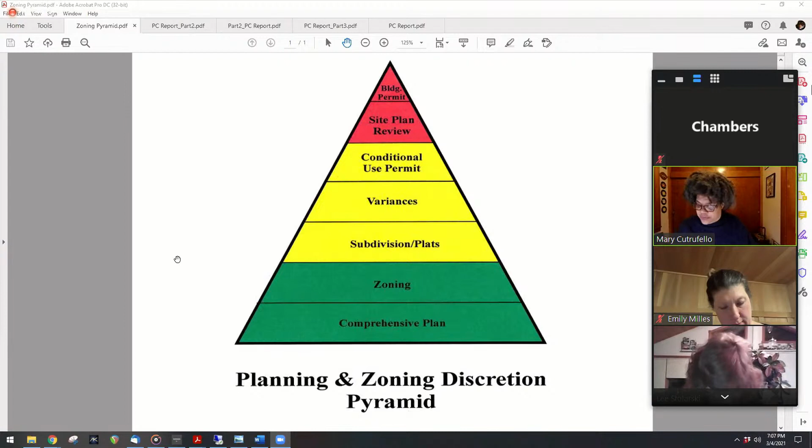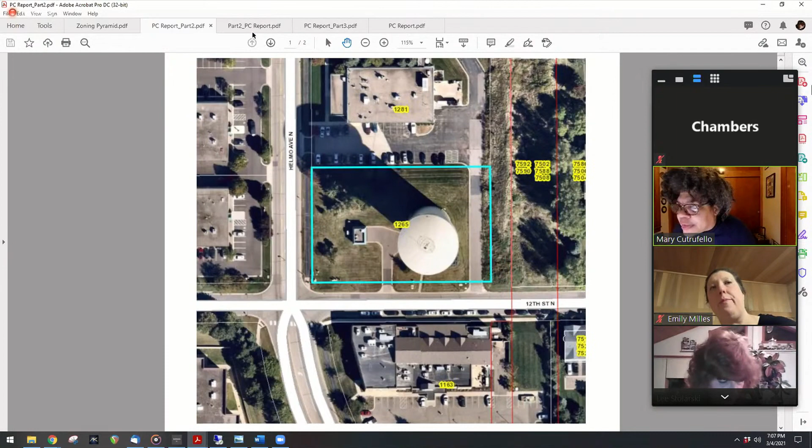So the idea is to build a temporary facility right here, on the same site as the existing water tower.

It'll be used to increase capacity, partly because of the new population expected to move into Willowbrook at Helmo Station, and also because there are some issues with four of our wells with PFAS in the drinking water. Brian Bachmeyer is here and can explain that a little bit if you have questions.

That's not really my area of expertise, but this is the plan for the site. This is the building. There's not any striped parking because it's not going to be manned on a regular basis.

The city comes by and inspects the well and the water tower every day, and they would just make this part of their daily inspection routine.

So other than that, it meets the requirements in the zoning code for lot coverage, setbacks, exterior design, and so on.

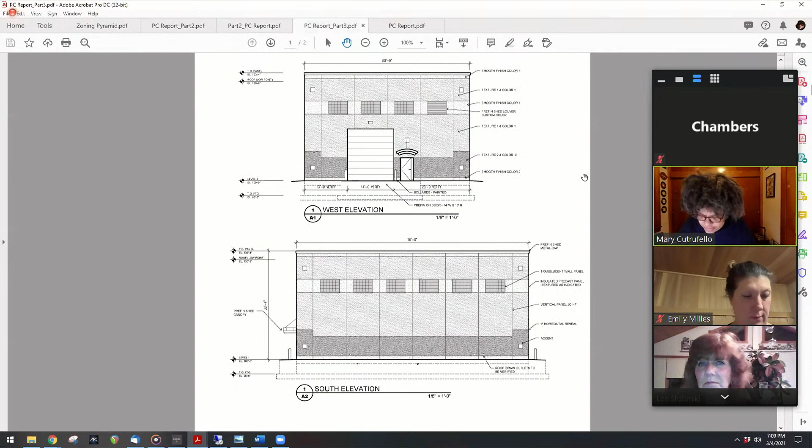They're going to add a bunch of new trees, and this is what it looks like. It's just a very nondescript building. It does meet our exterior design standards for class 1 and class 2 materials.

It's the back of it, looks a whole lot like the front. And other than that, there's...

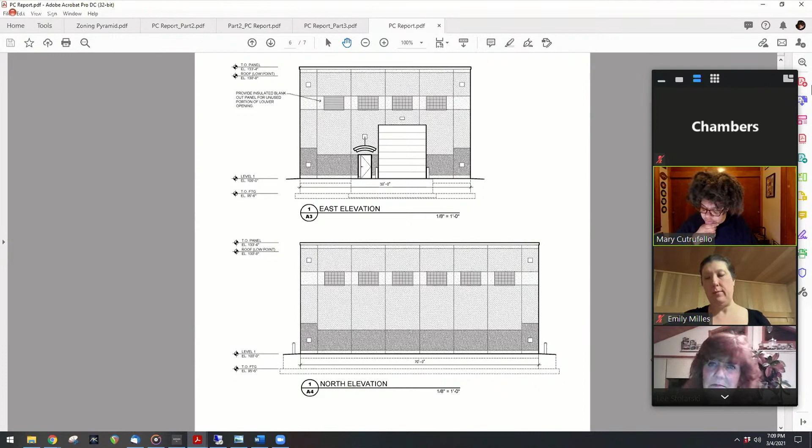Brian is cool with it. Cheryl Milgren has done her review, is fine with it. The fire chief, Kevin Wold, is fine with it.

And since it's in line with the comp plan and it follows all of the zoning code, staff recommends approval of the site plan, especially given the fact that the water situation is starting to come to a head, as it were. That's staff's recommendation.

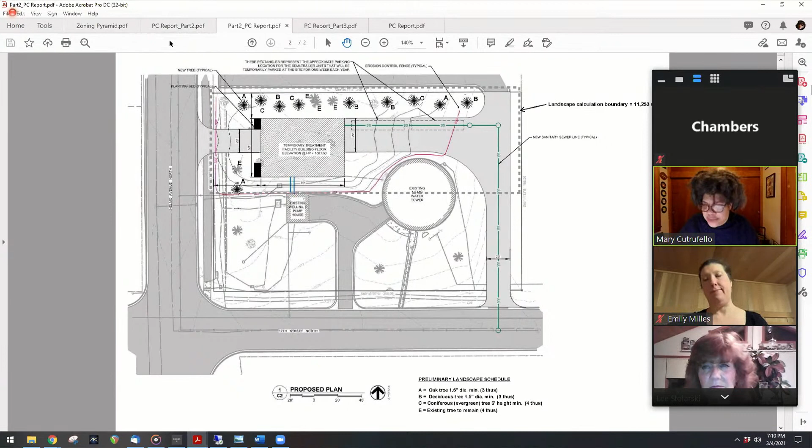As I said, Brian Bachmeyer is here, and if you have more technical questions, please direct them to him. Otherwise, I will answer any zoning related questions that you may have.

Do any of the commissioners have any questions? I have a couple of questions. Okay, Dallas, go ahead.

Mary, probably you'll pass this to Brian, but the first question that comes to mind is in the report, you mentioned that it's a temporary building. There's no mention of any duration or why it's temporary versus permanent, given the cost that would be involved.

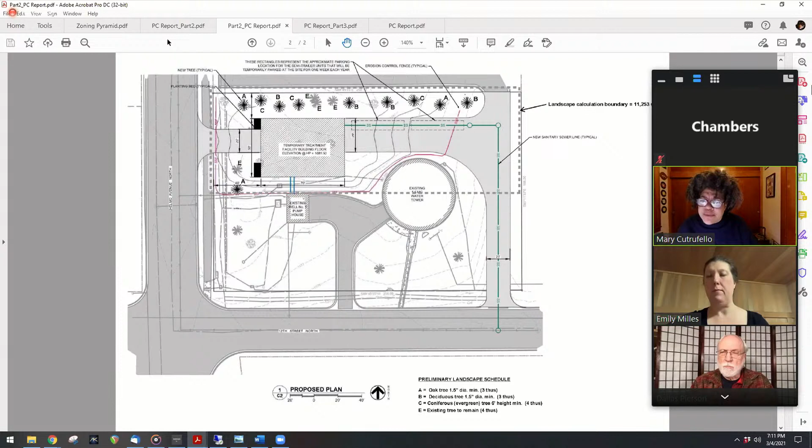It's temporary because when the new comprehensive facility comes online in 2025, all of the water treatment will be moved to that facility, and then this will be used for storage of off-season equipment. I'm thinking plows in the summer and things like that.

Okay, and I guess I've got a couple more questions that I had discussed with you and Brian. Perhaps you'll want to have Brian answer. The description of the treatment facility and what kind of treatment, carbon filter. And then questions on the well status, what the PFAS is at this location versus the ones we're currently using.

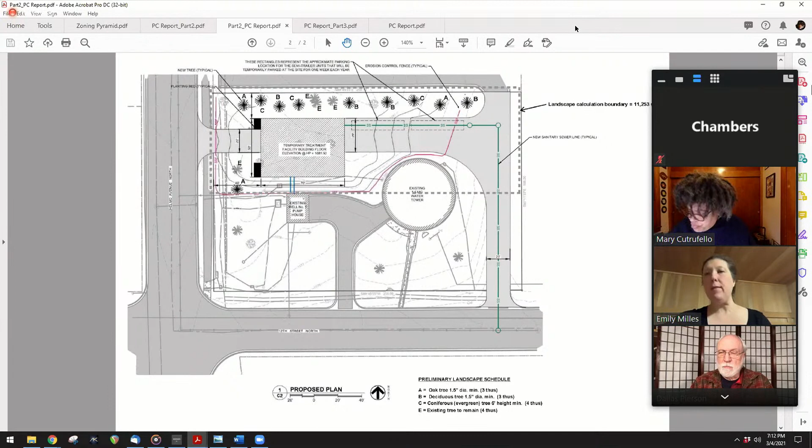Good evening, commissioners and council member Olson and city staff. This is Brian Bachmeyer, city engineer with Oakdale. Pleased to be here this evening to talk about our temporary treatment facility at the Well 7 site.

And I did prepare just a quick presentation. If I may go through it, I'll share it on my computer screen. It's pretty much based on a conversation that Commissioner Pearson and I had earlier this week. I think he had some good questions, so I thought I'd prepare a presentation to share with you that goes over the justification of why we're going to be doing this.

And probably kind of explain and try to answer some of the questions Commissioner Pearson may have. So if I may, I'm going to just share my screen here quick for a PowerPoint presentation.

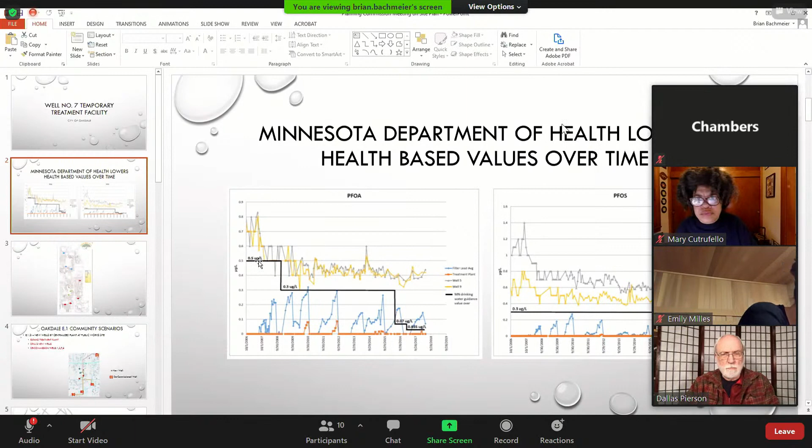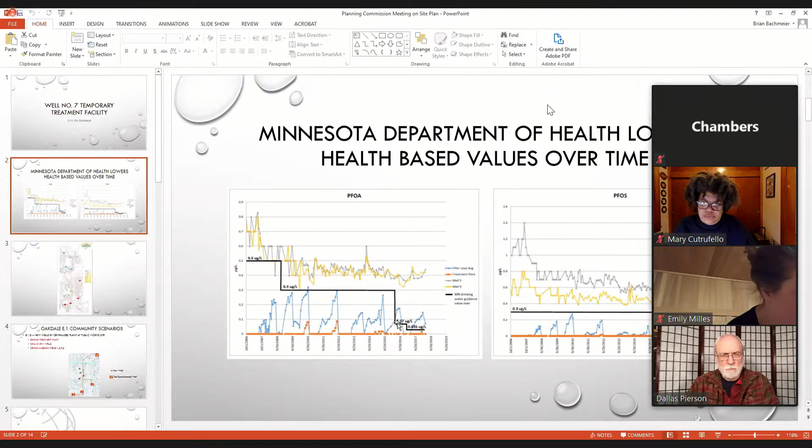The Minnesota Department of Health has, over the last 15 years, lowered the thresholds for what requires a well to be treated. Starting in 2006, PFOA and PFOS, those are the two PFAS materials that are heavily regulated. Back in 2006, they allowed 0.5 parts per billion in the raw water, then it dropped down in 2008 to 0.3 parts per billion, and in 2014 it dropped to 70 parts per trillion, which is 0.07 parts per billion. Then later in 2017 they dropped it down to 35 parts per trillion. So you can see how the regulations have become more and more restrictive over time.

What's on top here are the raw water levels of well 9 and well 5. Those are the two wells currently treated through our existing treatment facility. You can see the raw water exceeded those allowable standards.

Down here is the water as we're treating it. After the first vessel, it goes through two vessels, a lead and a lag. After the first, you can see it reduces the contaminant level from here down to these thresholds. And after we polish it through the second filter, it drops down to virtually non-detect. So those are the red numbers through here.

So you can see over time, we were meeting the regulations, and now the water coming out of the treatment plant is still below these very restrictive thresholds of 35 parts per trillion. Same for PFOS.

You can see we schedule the change outs as the lead filters start getting close to the thresholds before they go through the polish or lag filters. The resulting discharge out of the treatment plant is the red, consistently less. So those are the two wells, and that's how effective the treatment plant is that we currently have on the Public Works campus at 1900.

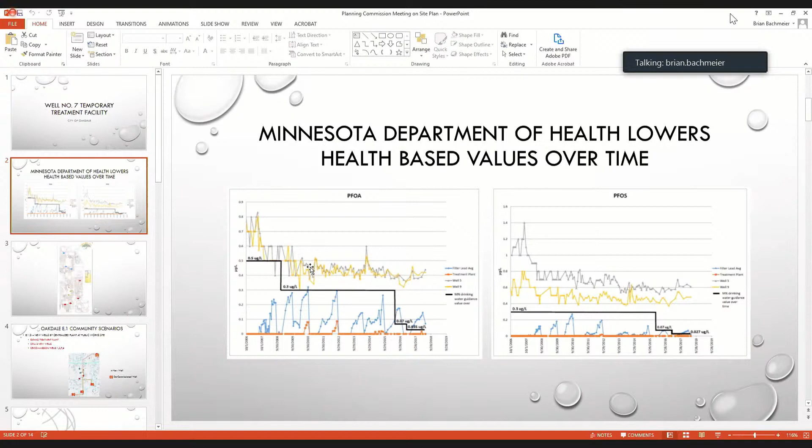One's right along Hadley Avenue between City Hall and Public Works. You'll probably recognize the building. The other one is also in Walton Park over by the ball field, part of a shelter on the west side of the park. So those 2 currently go through the treatment plant out to our distribution system.

We have 2 other wells on the north central part of the city, well 3 and well 10, that have raw water levels below the health-based standards. So they do not require any treatment. They are still in our operating system.

We also have 1 well on the northern part of the city, well 6. It's an emergency well, and the reason we call it that is because it has some poorer water quality as it relates to iron and manganese. So it's a well we don't like to operate very frequently, only on very high demand days or something like that.

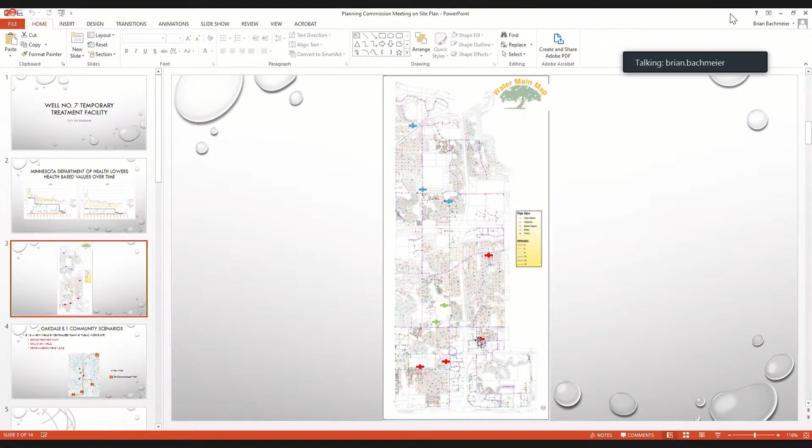But generally, we're fulfilling the city's water needs with wells 5, 9, 3, and 10, those 4 wells. As Mary indicated, now that we're seeing Willowbrook development and the HELMO station, we are now exceeding, or will be exceeding, capacity of these 4 wells, and we need to look at trying to treat one of the wells that we currently are not operating.

As part of the 3M drinking water settlement, you probably read some articles on the state settlement with 3M. I believe the original settlement was $850 million. There is now $720 million available to the East Metro area to treat water and to improve the groundwater that has been affected by PFAS.

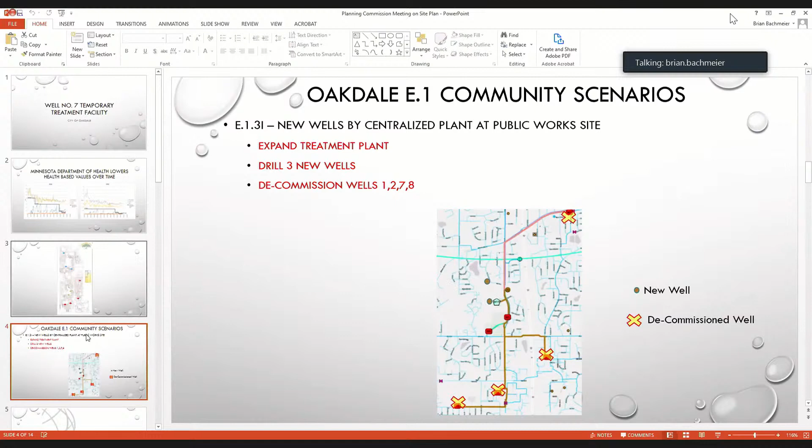That plan for Oakdale shows these 4 wells coming out of commission, and then developing a centralized treatment plant at the current Public Works location, drilling 3 new wells to replace the wells coming out of commission, plus the 2 existing wells that currently operate. Everything would be centralized at one location where we treat the water and supply it to the distribution system.

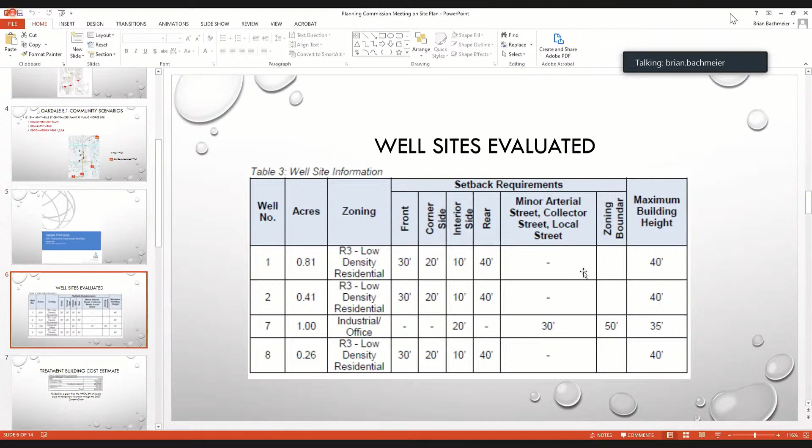We did a study in 2019 that concluded in early 2020, evaluating those 4 well sites to determine which would be most suitable for on-site treatment, as opposed to a centralized treatment plant. The study evaluated wells 1, 2, 7, and 8, identifying parcel size, current zoning, abutting residential properties, setbacks, and other zoning regulations related to height and building size requirements. We put all that into a chart.

We also estimated the cost of building a treatment facility, about $5 million. This is ultimately funded through 3M, either because they pay for temporary treatment facilities through the 2007 consent order.

The conclusions of that study indicated that we have a need for 1 additional well that should be treated for some immediate future needs, and that in the future we'll need 2 additional wells for capacity. That centralized system we were talking about does provide for that.

Most of these wells are in residential areas, so it appeared that well 7 would be the most suitable location because it's surrounded by industrial, commercial properties, and it's a larger parcel of property. There was one option of combining 2 wells at one location by Tower Park, but it would result in losing the play structure currently in the park, so we didn't feel that was an acceptable option.

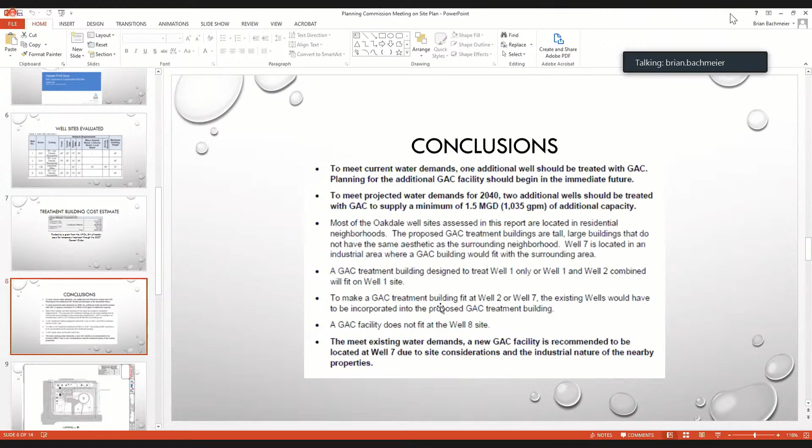The conclusion was that we should look at installing a treatment facility at well 7, and that is the recommendation that came out of that study.

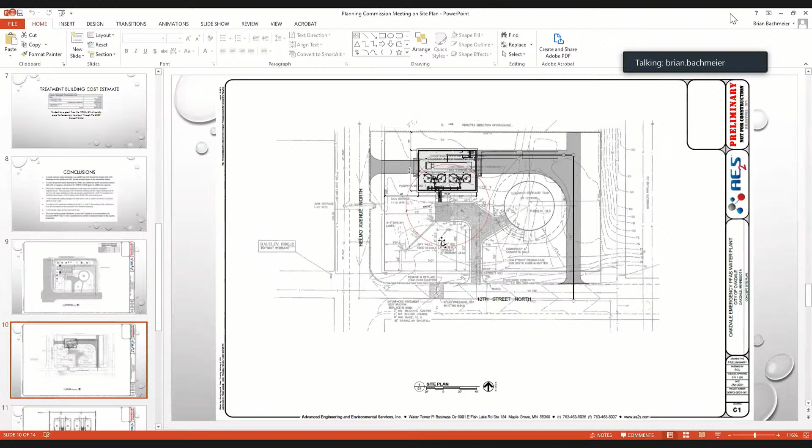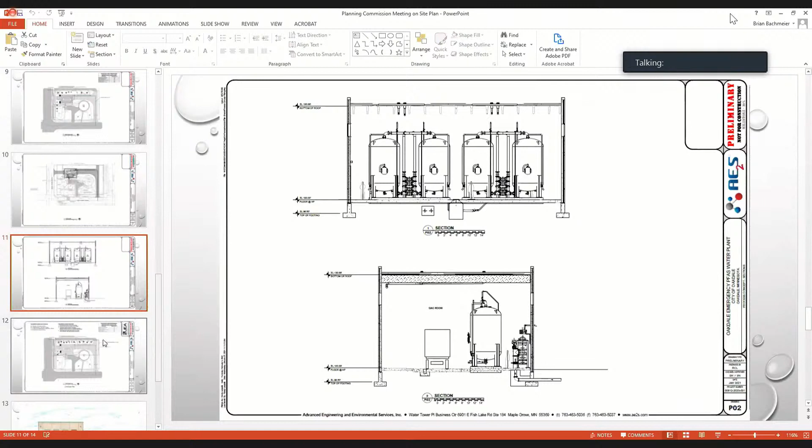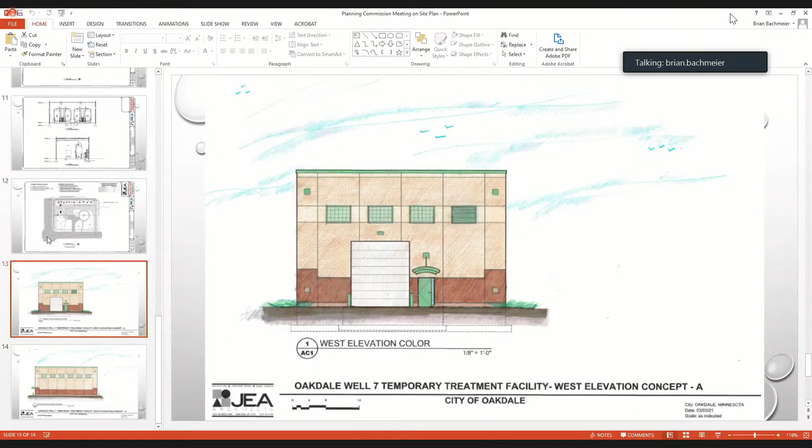What we're intending to do here is a tilt-up panel, which provides for expedited construction, but it does meet the city performance requirements as far as texture, composition, and mixture of metals and concrete. This is probably similar to a lot of the other public facility buildings we have, with a darker colored base and a lighter colored upper portion. The metal components are green flashing to match the green of City Hall and some of the other public facility buildings.

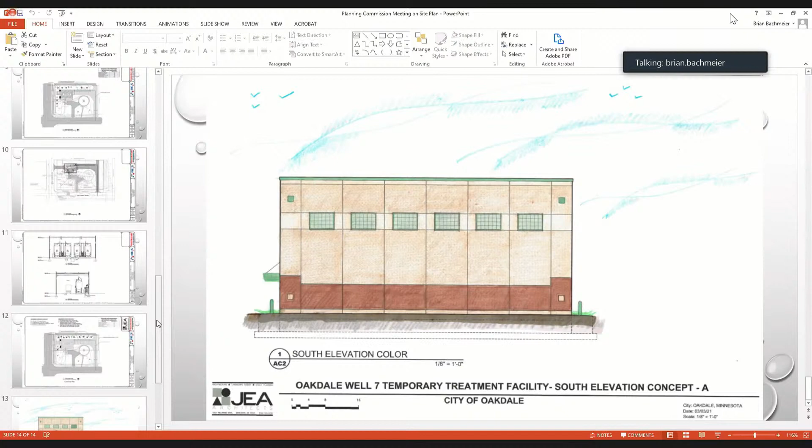That was kind of what I tried to address after the conversation with Mr. Pierson. Were there any other questions or things that I did not address from Commission Member Pierson? No, I think that does a good job. Yep, nice job, Brian. Thank you very much, Brian.

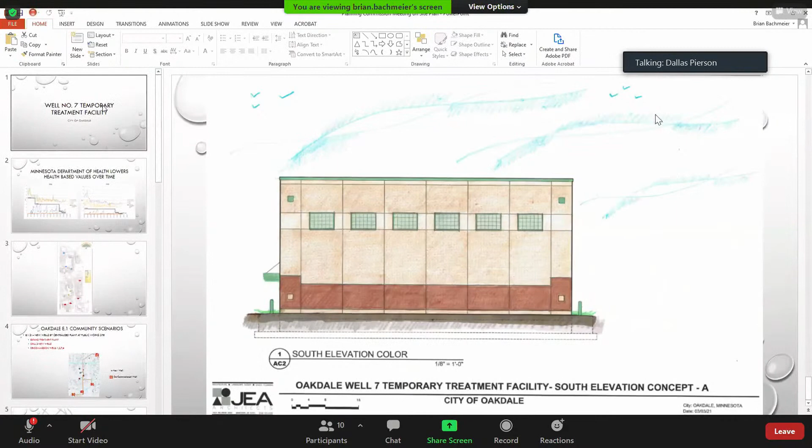Is there any more discussion? I have a question for Brian. Is there any increased noise associated with this building? No, there are no emissions and virtually no noise. You can have a conversation standing in the building when it's in operation.

It's a passive pressurized system. The water just goes through the filters. It takes 10 minutes for the water to go through the filters. So it's a very quiet system. You will hear nothing outside the building, and even when you're in the building, you can have just a standard conversation. There's no issue with that.

The only discharge out of the building is in the summertime. You can imagine the water coming out of the ground is around 55 degrees, so when it goes through the vessel, it creates a lot of humidity on the side of the tanks. So there is a dehumidifier in the building that tries to dry the air, to keep it so that the water doesn't drip around the base of the filters. It's just humid air that's discharged periodically out of the building to control humidity.

And how quickly do you think this will be up and running, if it's approved? We are running it on an expedited schedule. It's our hope to have it up by midsummer, so that if demand does increase, if we have a dry season, we would put it into service right away. If we don't have demand, we'll wait until the demand comes with Willowbrook. But if there's an opportunity to operate it yet this year, we will.